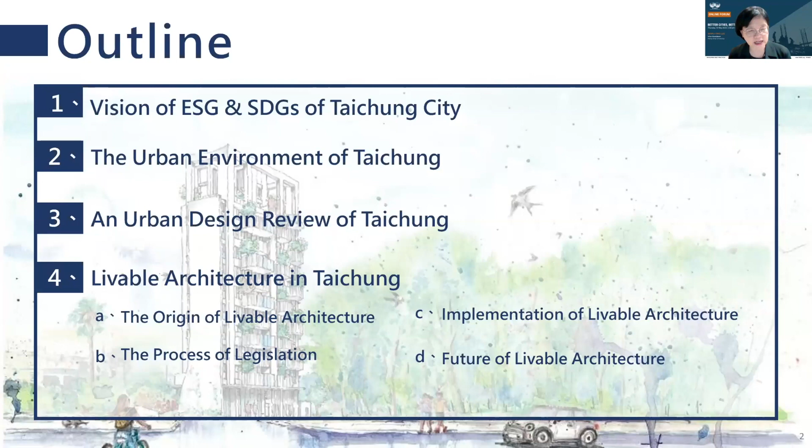In the second, third, and fourth parts, I will start to share about the environment of Taichung and how we review the buildings in the city. And most important is the last part, I'd like to share about the green policy we have in Taichung City.

All right, that will be the first part, visions of ESG and SDGs of Taichung City. And why ESG? I think people probably will ask, what is ESG? ESG represents environmental, social, and governance.

It is quite popular now in Taiwan to evaluate companies and investments, looking at people in the company and their impact and sustainability practice measures.

The reason why we particularly focus on ESG is because when I shared this with Lily and other friends in previous slides, people asked me what ESG is. And in Taiwan, we are a country that has lots of experts and exports to the world. Taichung City has six major industries that are world-class competitive.

Because of these companies, for example TSMC, one big company actually has more than hundreds of franchise companies linked together with TSMC. So these companies are facing the issue of 2050 net zero carbon.

At the same time, because these export products go to different parts of the world, they also have to face tax issues. So for many companies in Taiwan, ESG has become a very essential part to discuss, along with their mission, challenges, and vision.

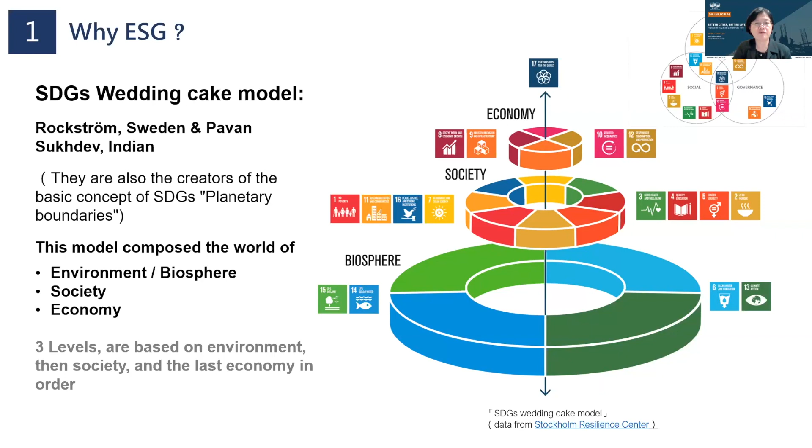And we're probably all familiar with the SDG 17 goals. The sustainable goals were actually developed in year 2000. At that time, they were called the Millennium Development Goals.

At that time, there were only 8 goals, focused only on social issues for developing countries. They were looking forward to achieving those goals by 2015.

But by the time 2015 came around, people understood that the world was in a dangerous position, that global warming and climate change had become a big issue. So in 2015, the United Nations introduced a different set of goals, with more focus on environmental sustainability.

This time, the 17 goals are not just for developing countries, but for the world. All 17 goals are for all of us to follow. You can see the relation between SDGs and ESG, and between these two, each principle and each goal has a different emphasis. This gives us a very good guideline. I hope later we can share more information through slides or video recording.

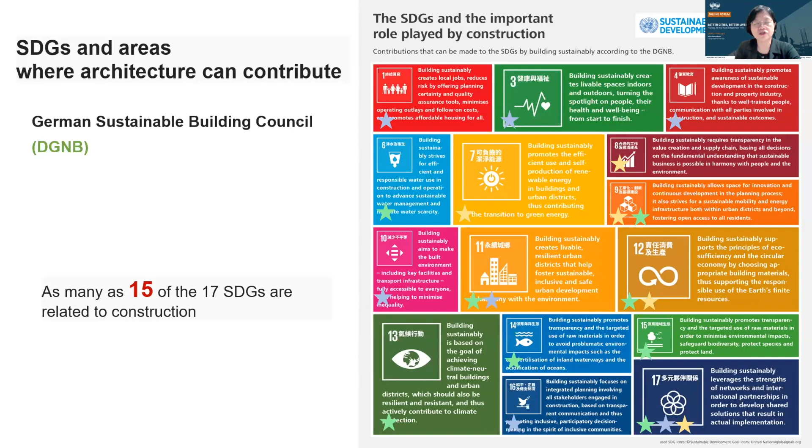I like the idea proposed by the German Sustainable Building Council. They mentioned that among the 17 goals, 15 are actually related to architecture. But more importantly, there are 6 very top priority goals with strong connection to architecture: SDG 3, good health and well-being, and SDG 7, affordable and clean energy.

No surprise, we already saw slides presenting a lot of information about these. SDG 11 is about sustainable cities and communities. SDG 12 is about responsible consumption and production—I always call this circular economy, if you're familiar with that symbol. SDG 13 is climate action, and SDG 17 is partnerships for the goals.

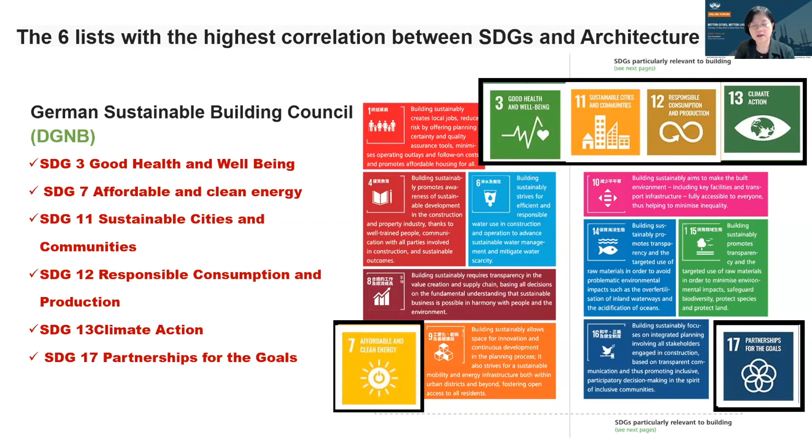That's what we are doing here at FIABCI—through partnership, we try to make the world better. Not just the SDGs from the German Council, but also from the World Green Building Council, who surveyed among the 17 goals.

These are the 9 very top priority goals with high relation to architecture. Among these 9 priority goals, they determine what green buildings are looking for. For example, this diagram shows how they relate to architecture, with different icons representing different SDG goals.

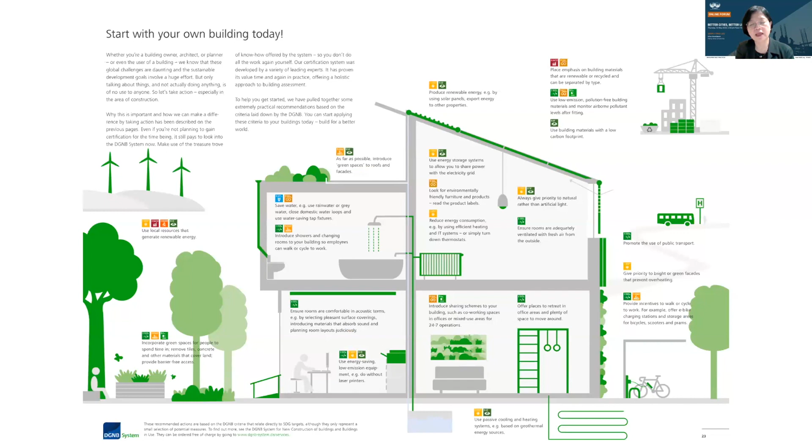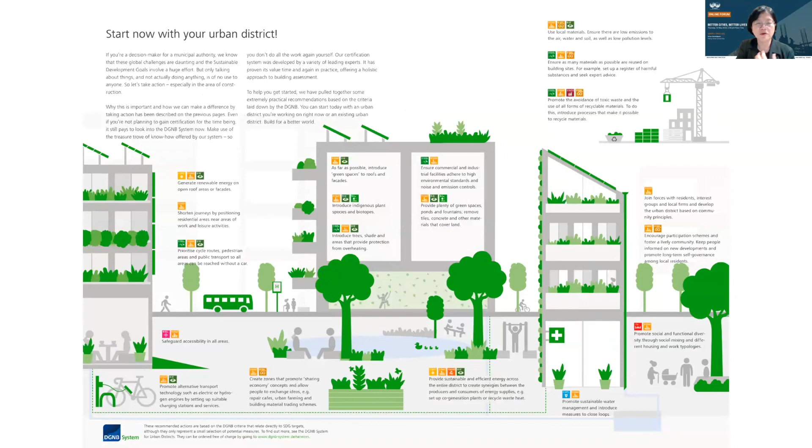This is about the building, and when enlarged to the urban area or city scale, we have more and more different SDG goals involved with all the different development. So from the architecture scale to the building scale to the city scale, these are all related—no matter the scale, no matter the place in the world.

Back to Taichung—these 4 are the very top priorities our city volunteers to focus on. The first is affordable and clean energy, which is a really big issue in Taichung because Taichung City has the largest coal-fired power plant in the world. We have terrible air pollution issues, so affordable and clean energy is very important for Taichung City's development.

SDG 9 is about industry, innovation, and infrastructure. SDG 11 is about sustainable cities and communities. SDG 12 is about responsible consumption and production. These are the 4 top priorities—our volunteer commitment as a city to borrow. But beyond these 4, the rest of the 13 goals are still on the list for all different departments.

The second part I'd like to share is about the urban environment of Taichung. Before introducing the policy, I think policy reflects locality—where you are located in different regions. So the typology and natural phenomena are all very important. I'd like to give a brief introduction to Taichung's urban environment.

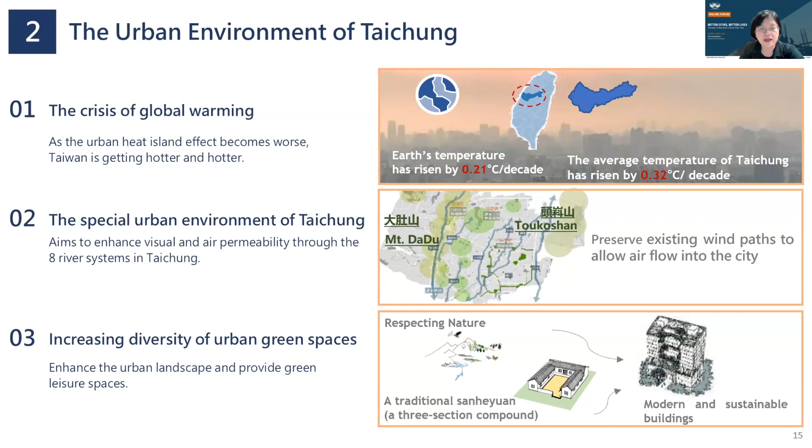The third point is that according to the traditional 3-part compound buildings, we try to create high-rise buildings based on that concept, because the central part gives more space to socially engage with people. At the same time, the wind coming through this direction gives a better, natural way to reduce the temperature. So this is how we are learning from nature.

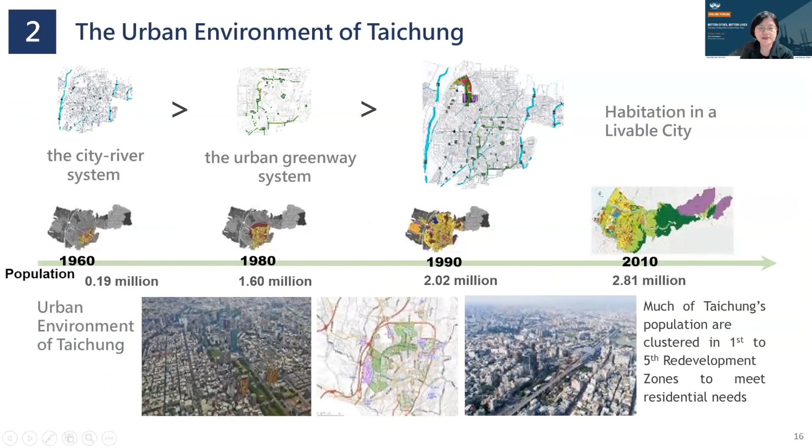Since 1960 to 2010, the population increased a lot. The city actually went from low density all the way to high-rise buildings. This is the challenge for us, why the green policy is so important.

Let's look at the architecture of Taichung City. All the buildings, when they are over a certain size, every single high-rise building has to be evaluated by the urban committee, and I'm one of the committee members. When we review these buildings, there are some principal guidelines, for example advertising, street fixtures, light features, pedestrian and landscape, and all the green aspects. These are the things we will review.

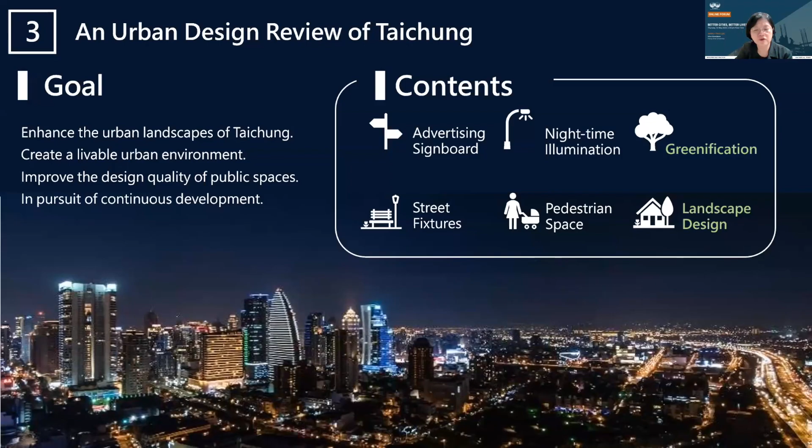But just looking at these is not good enough to form our city. So during the reviewing process, before we had the policy, we encouraged our developers and architects to bring more green to our city, particularly those high-rise buildings. Like Lily's company, Treasure Dragon, actually did this before the policy. What we recommended and suggested to them first was to encourage this concept of livable architecture, to bring more green to our city.

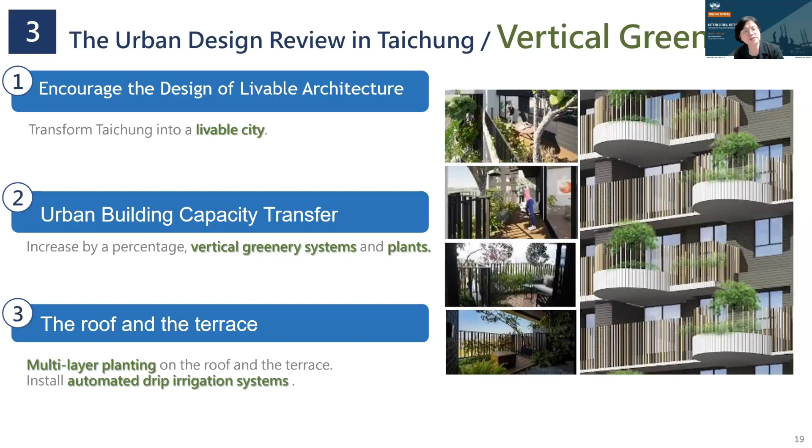Second, we suggested since our high-rise buildings are going up, can we bring more vertical green, a double skin of green to our concrete facade? And third, not just the facade, but also the roof and terrace - can we do something about that?

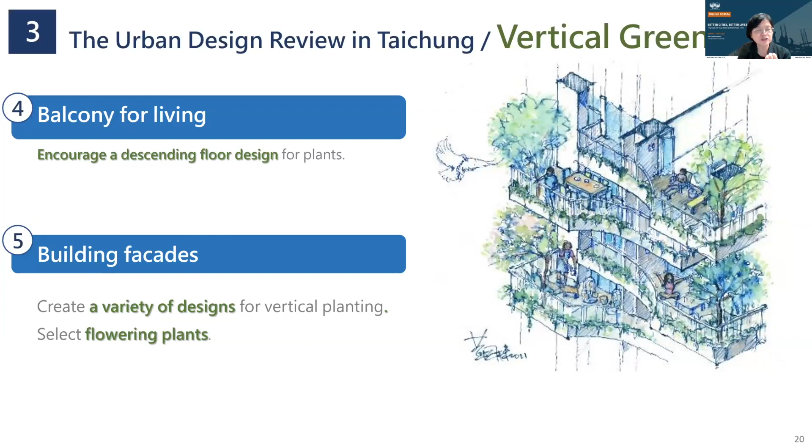The last part will be the most important part I'd like to share. I hope I have enough time. The livable architecture policy in Taichung - the reason we really have this policy is when using it, there has to be incentive to encourage people.

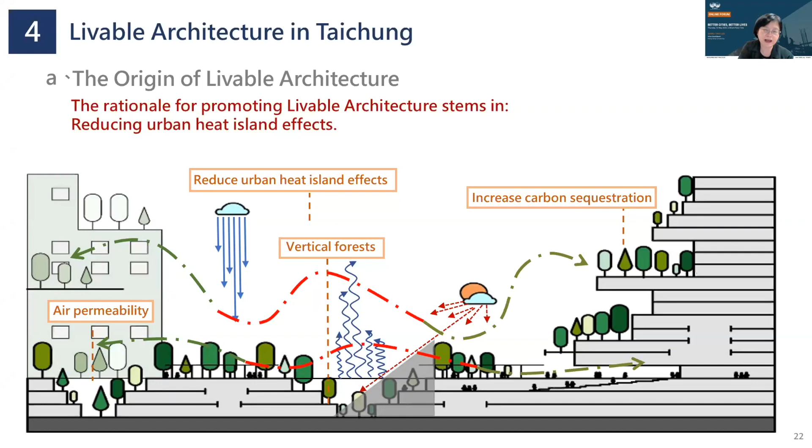This policy encourages people to try to bring more green to the built artificial buildings and architecture parts. The main reason is because the temperature is getting higher, with global warming and the heat island effects in our metropolitan city.

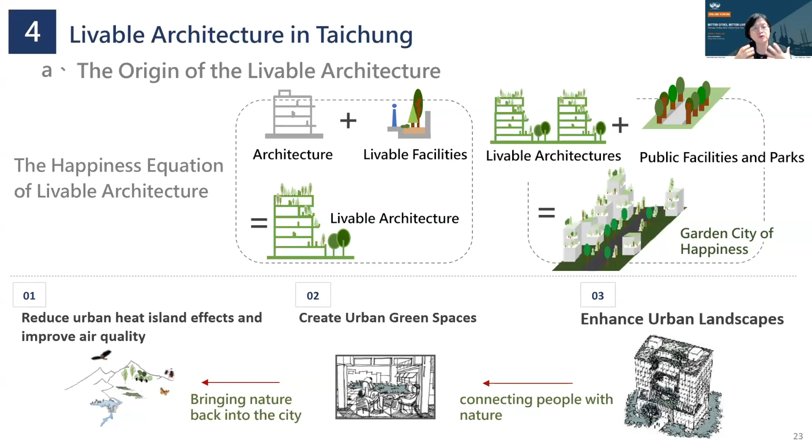So this is the main reason why we want to bring more green. Not just the architecture itself - we try to use many policies and different devices or designs in different sections to make the building look more green. The main reason is to bring green nature back to the city and connect people with nature, not just staying in this concrete box, but spending more time with nature and engaging socially with people.

These four elements are a very important policy. The policy is big, but we try to summarize four policies to encourage people to build with livable architecture, and the incentive is that we will not calculate their volume.

Before, we tried to convince them to use this, but all the balconies and extending materials and items would be calculated together into our total volume. But now with these four elements - the first one, green vertical green facade - of course we recommend it.

The second will be double layer sun shading. The third will be sun shading in a horizontal way. The fourth will be multi-level balconies. All these elements, we encourage and no longer calculate them into our total volume.

That means all the developers and architects can design these and still maintain the volume they have without losing anything. They can have more green without using any total volume allowance. The incentive is actually quite strong here.

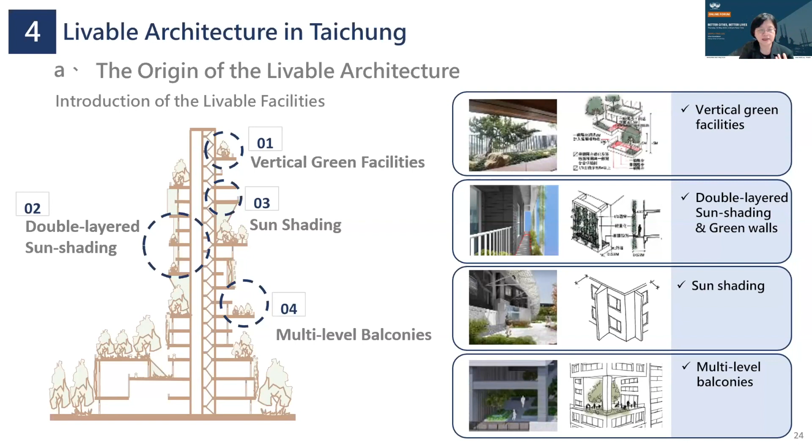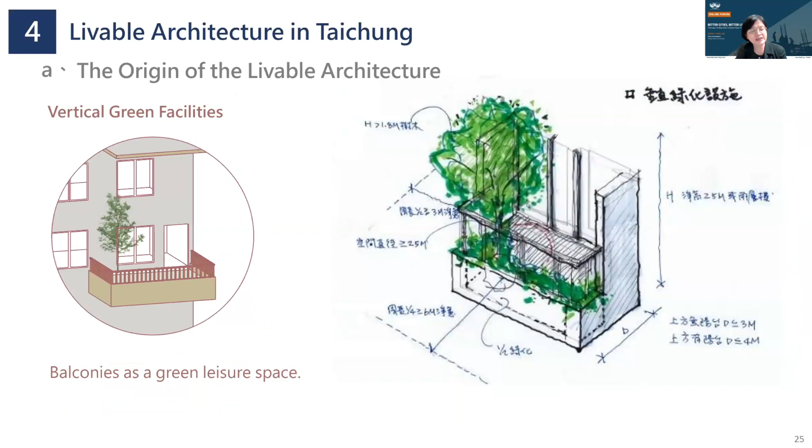For example, these are the details - these are the balconies. We should have balconies where people can have leisure time. But for the same type of trees to grow, you need to have double layers instead of just one layer. So these are the details we have.

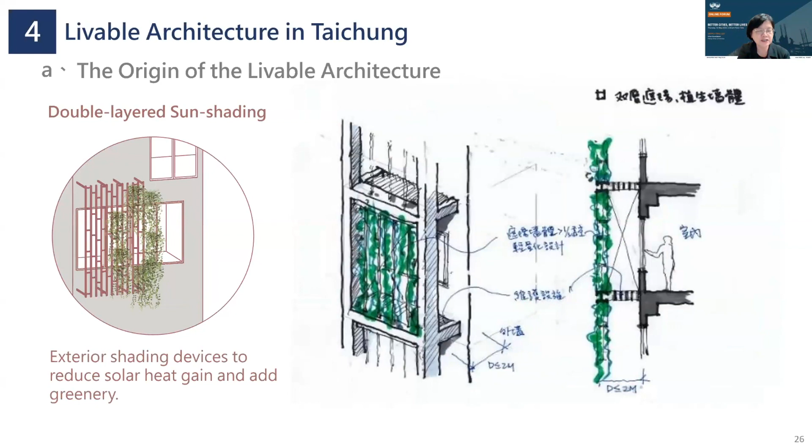And of course, for the double layers, instead of just metal or wood, we suggest using green instead of other artificial materials. This actually helps reduce pollution and drop the temperature too. Different shading also helps a lot for sun to penetrate through.

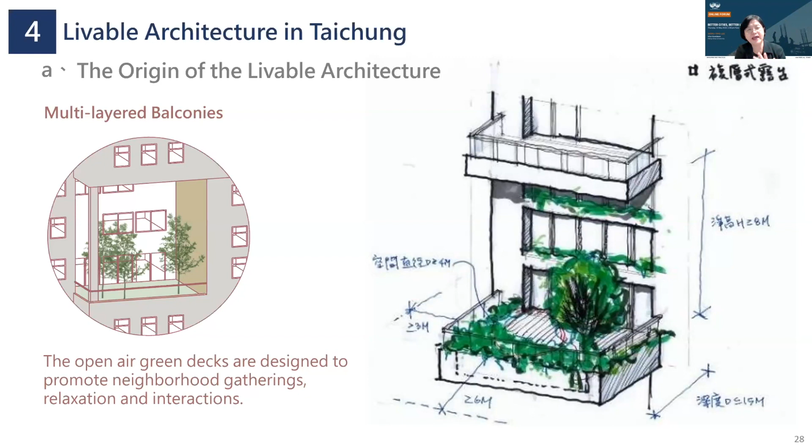And these are the large balconies - we really encourage them. Just imagine, before, these balconies had to be calculated into total volume, but now because of the green policy, they no longer need to be, and they can have more in front of their facade. So the building will look very, very green in all different aspects - it's very dynamic.

For example, these are a few examples I'd like to share. This is the first one, we call it Mood Park. You can see the elevation facing south already has many green ways.

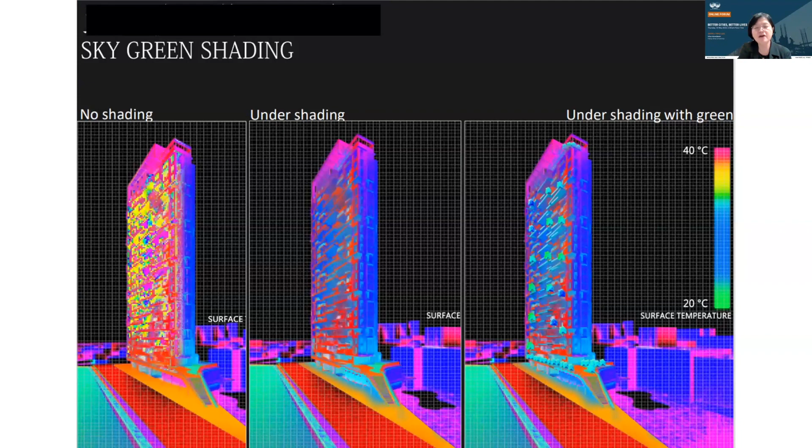We also strongly convinced architects they should do the modeling before they start doing design—like which part will have the most sun penetration. They should have more shading, and also with shading, how much they can preserve energy—this kind of concept. You can see in this picture several devices.

Just imagine Taiwan is a tropical season—this green actually has great potential. And the building no longer looks like a concrete box; actually it looks like a big tree, with these like three small trunks and leaves together with this big trunk.

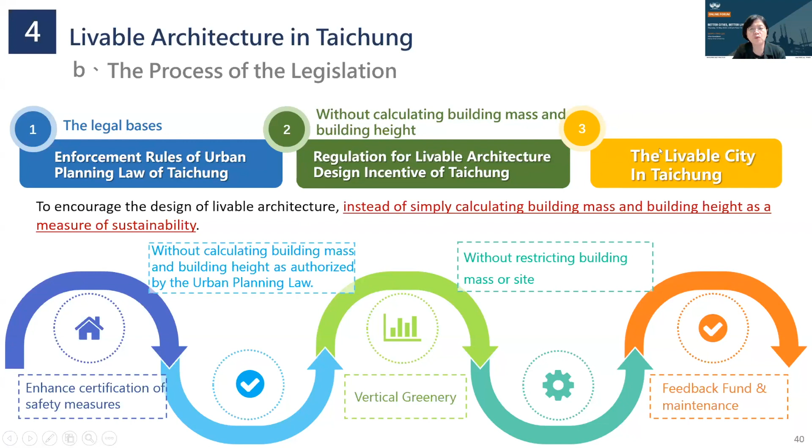So it's a sequence from the legal basis, and calculating the way, all the way to achieving that livable city in Taichung City. And toward that, this green policy, so far since 2019, we already have 114 cases, and 9 cases already accomplished.

This is an increase of almost 4,500 trees and a decrease of 10,135 tons of carbon emissions. We try to compare this concept—it's almost equal to the idea of Wenxin Forest Park in Taichung City, or a small neighborhood park around us.

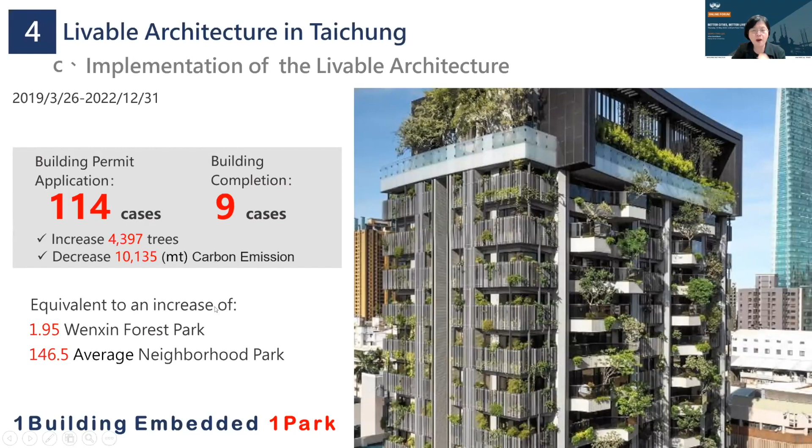So the concept is that every single building with green policy, in the near future, we hope to see an embedded park in our society, in our neighborhood.

So looking back at this green policy, what we can do in the future is try to simplify the law and try to embed more technology to maintain it, because trees still need to be maintained. Of course, more accessible design for the elderly, children, and disabled people, and more green for our neighbors.

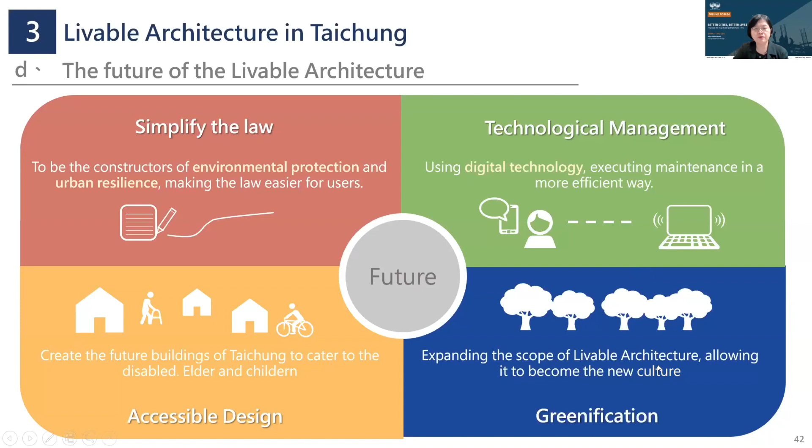In conclusion, we can see the vertical green policy reduces the heat island effect, transforms the urban landscape of Taichung City, and improves air quality. Second, livable architecture improves quality of life, provides leisure spaces for residents and the general public, and enhances sustainability through energy efficiency. More importantly, every single building after the green policy helps build better cities, build better lives.